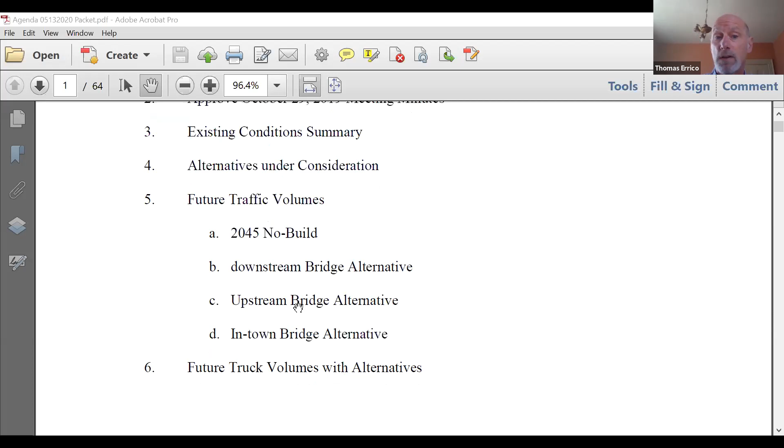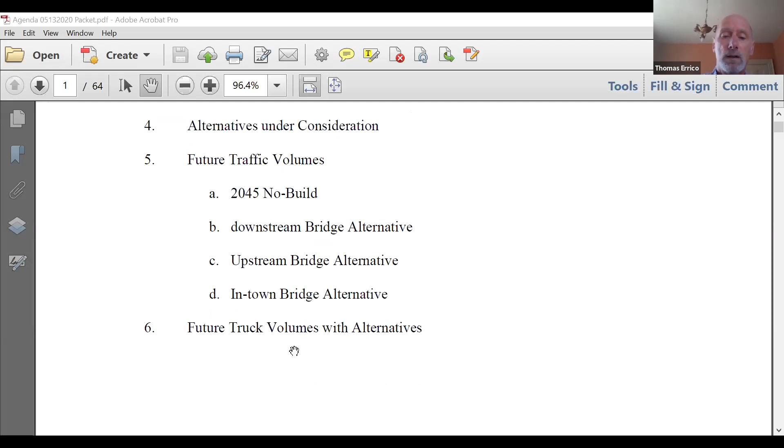It's really informative. We'll talk a little bit about truck volumes. We know truck traffic is important in understanding and assessing as part of our work. So we'll talk about that. We'll get into the highway bridge concept design, give you that 30,000 foot view of what we've been doing from that perspective. Talk a little bit about system management. Are there things you could do within the existing roadway infrastructure to make things work better?

Talk about the next public meeting. We had a public meeting last September. We're now ready for another one to start feeding some more information, like what we're going to show you today, to the public. Hit on schedule, and then anything else anybody wants to talk about. So that's the agenda. That's how we're going to walk through it.

I know I'm interrupting, Tom, but how long is our meeting gonna take? Can we come to a little shared agreement on that? What are you thinking, Tom? I'm thinking, certainly it's based upon input, feedback and discussion, but I would think we'd be running about an hour from this point forward. Does that sound okay to everybody before I let Tom go? If we plan to adjourn this meeting about 11:15? I don't see any objections. So that's what we'll plan on.

And Tom, would you like people to hold questions or interrupt, or whatever? I'm going to turn back to you, but whatever. Yeah, turning back to you, Tom. Yeah, thanks, Craig. I would just as soon have questions as I proceed along. That's traditionally how I like to do it if we were doing a face-to-face meeting. So if we're going through something, raise your hand and I'll do my best to respond. I'll say that if I can't respond to a question today, we'll provide some sort of written response. There may be questions I don't have an answer to, but we certainly will get you some response formally if I can't answer it today.

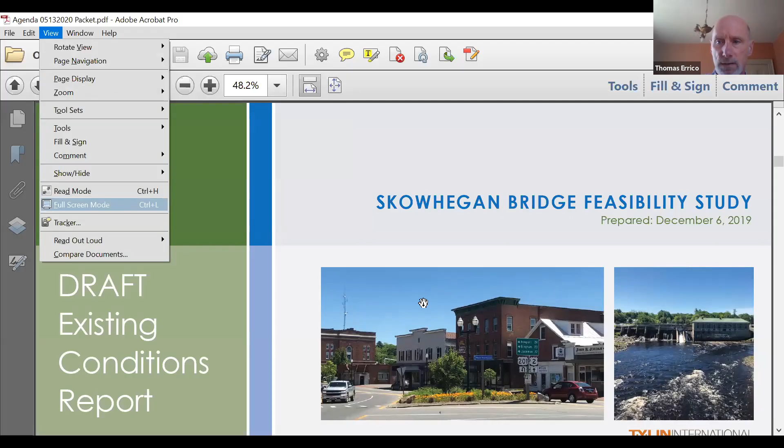There's a lot here. I just want to hit the high points and go through this. It's still considered draft, there's still some revisions we're doing, particularly as it relates to the environmental section. There are just some minor tweaks before it gets the final stamp put on it, but I'll give it a 98% complete rating on where we're at. It provides a lot of information.

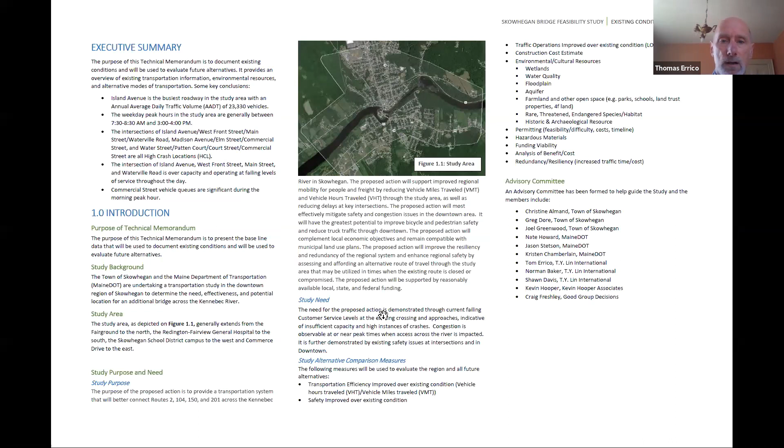Remember, we've talked about this, the study purpose. I'm not going to walk through it, but that study purpose and study need is our guiding principle about what we're going to refer to as we continue to move along and look at these alternatives in specific detail in terms of measuring feasibility. So just keep that in mind, it's in that document, something we're going to go back to quite a bit.

Back last June, the Department of Transportation collected a lot of traffic information. We have really good information. These bubble diagrams represent, I won't torture you by going through them, but basically how many vehicles are turning at certain intersections. This is really what we rely on in understanding the performance and how well intersections work or don't work from a congestion perspective. So these are important, really solid information.

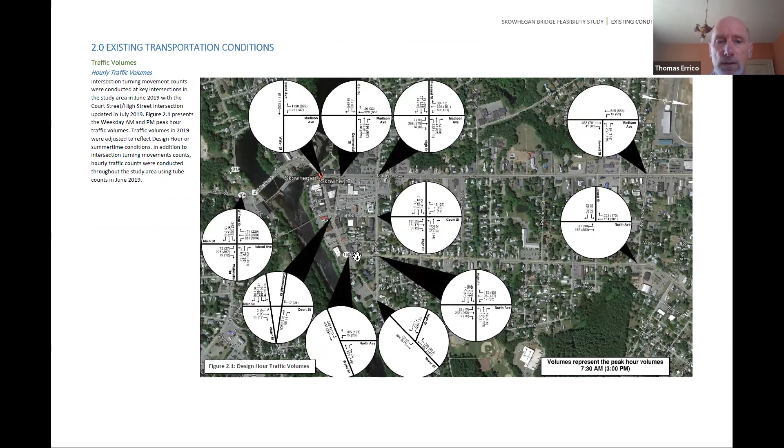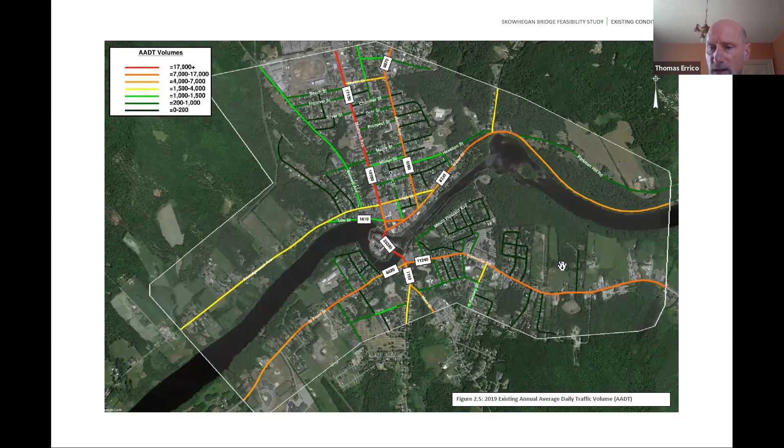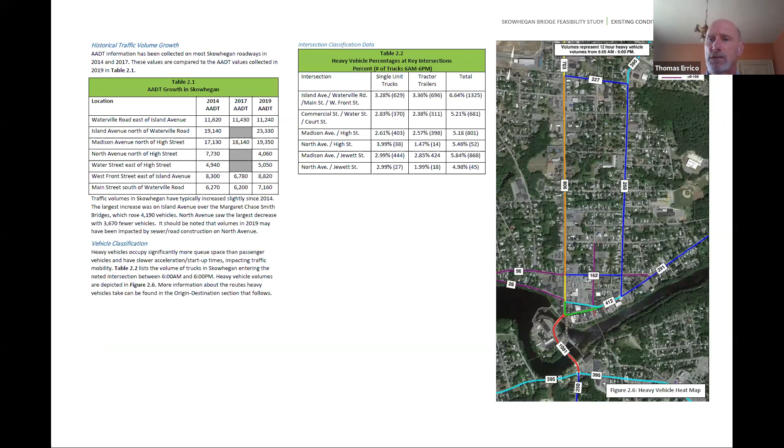One of the things we wanted to do as part of our baseline understanding of traffic conditions is really understand origin destination patterns, particularly related to trucks and other vehicles too. We collected and analyzed some data that helped us understand that, and this data represents basically patterns crossing the Smith bridges and sort of origin destination.

So from the standpoint of where are they going to the north and east - there's roughly 47% headed up towards 201 north, 35% heading up North Avenue, 18% heading east on Route 2. On the south side, 35% of these heavy vehicle trucks headed west on Route 2, 50% headed east-southeast on 201, and 15% headed on Main Street. So that's generally the pattern of trucks.

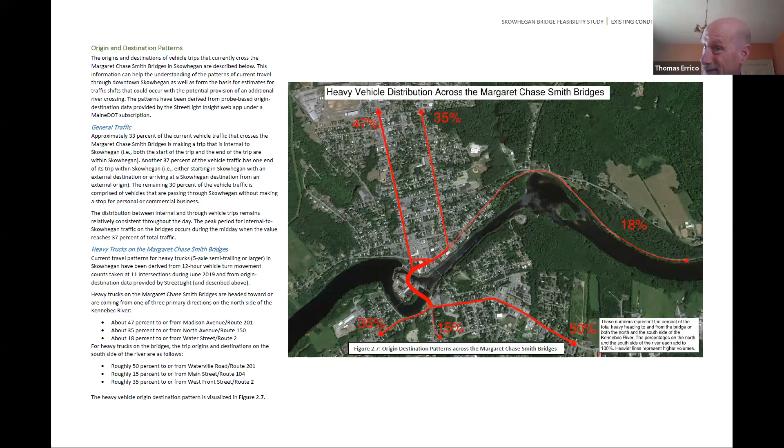We also drilled down to understand specifically - and this is really informative to understanding, like if you built a bridge, where would the trucks go. We found that if you're arriving from the east on Route 2, about half would cross the bridge and half would go up 201 north. In terms of vehicles exiting on Route 2 going east, about 71% had origins on the bridge to the east, and 25% was coming down 201 and going east.

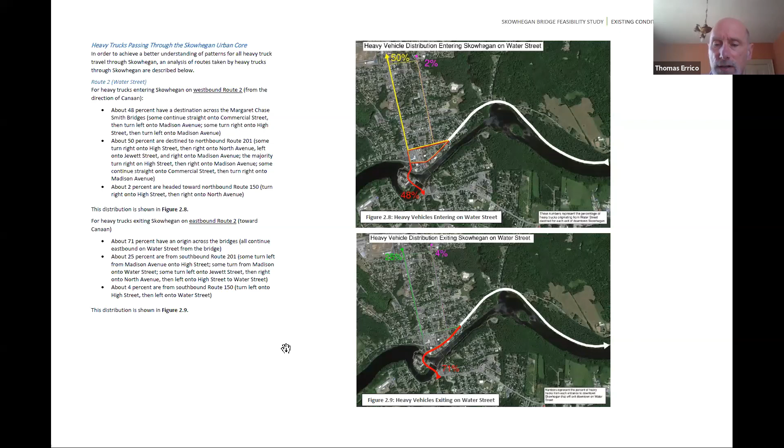So we had various origin, destination, entry, and exit points, and these graphics present what's happening from a truck distribution perspective. I'm not going to go through these, but I think they're relatively straightforward.

I'm not going to talk about that.

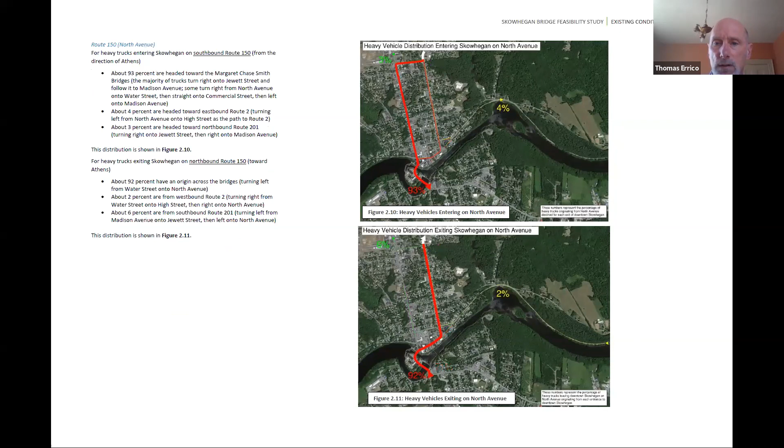There were a couple others that had some crashes that weren't technically high crash locations, but had a certain number we thought were appropriate to add.

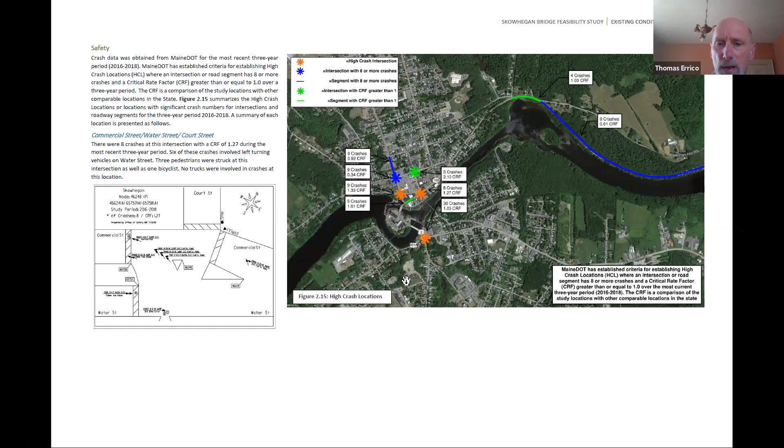We have collision diagrams that tell us what's happening at those high crash locations. This is the Commercial, Court, Water Street intersection - vehicles going around the corner, the triangle, getting hit by vehicles going west. You can see how things shake out at the various locations in terms of pattern, which helps us understand what's going on and maybe how to mitigate some of those safety problems.

The next thing is related to traffic mobility and intersection capacity. We have a model where we plug in information - traffic controls, signal timing, the number and type of vehicles, and other things - and come up with something called level of service. Qualitatively, it's rated like a school grade card from A to F, A being a good intersection, F being poor, and it's delay driven - how long you wait at an intersection in seconds per vehicle.

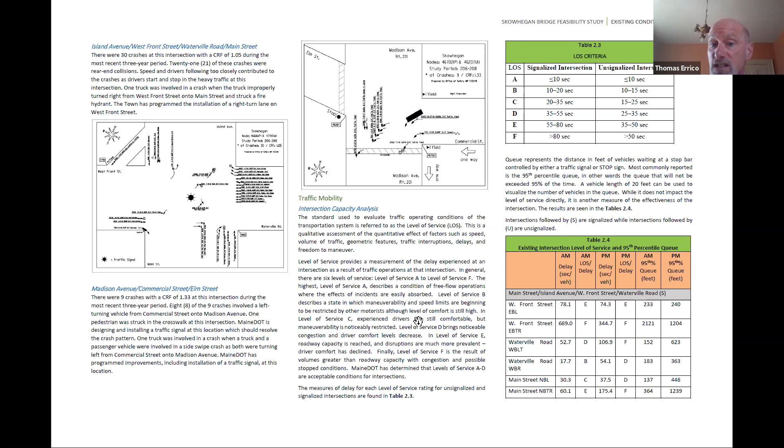The first intersection in this table really doesn't work well - everybody knows about it, Main Street and Island Ave. The model confirms what we see in the field: long queues, long delays. Many of the other intersections, quite frankly, work reasonably well. Some of these conclusions assume optimization of the traffic signal timing, if it is signal controlled.

The one other intersection with issues from a delay level of service perspective is Madison, Elm, and Commercial Street. This is setting the baseline, and we'll use this model to estimate level of service and delay in the future with various alternatives.

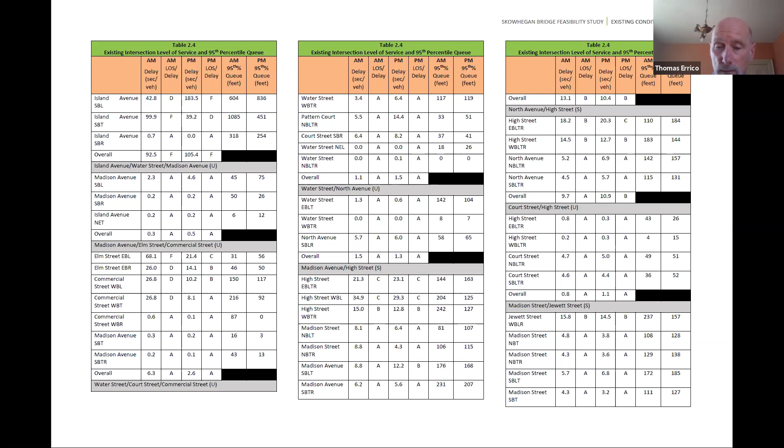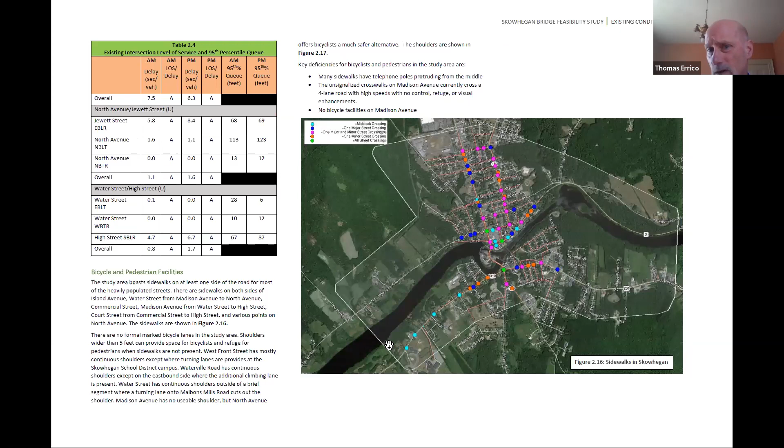We looked at bicycle and pedestrian facilities to gain an understanding of those modes and infrastructure, and what's accommodated in terms of sidewalks and crosswalks. We provided general qualitative documentation of that, talked about shoulders related to bicycle accommodations - are there shoulders so a bicyclist has appropriate space - and documented that. We also talked about bus transportation and what's available in terms of alternative modes. That covers most of the transportation part.

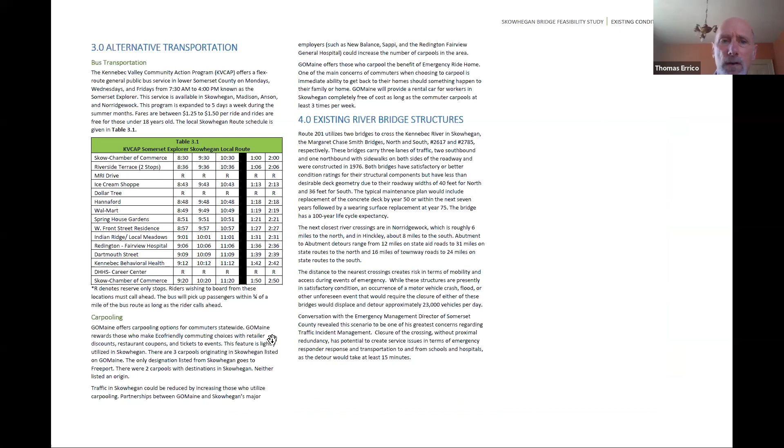The second part of the document relates to environmental resources - that's our subconsultant, TRC, an environmental consulting firm based in Maine. They looked at historic, archaeological, and natural resources in the study area, that yellow area, covering a host of things.

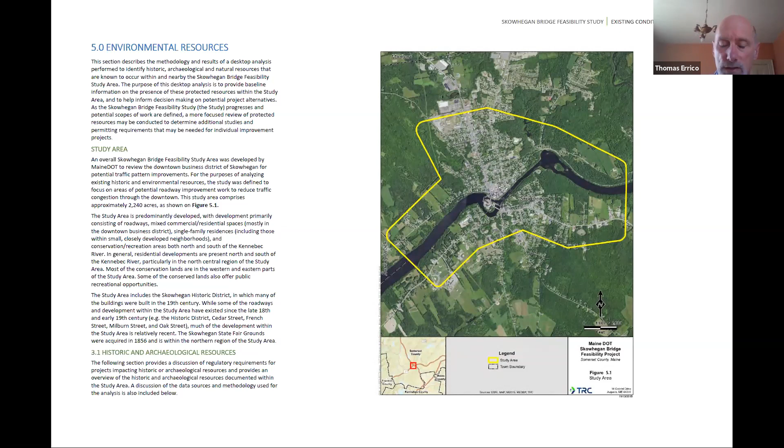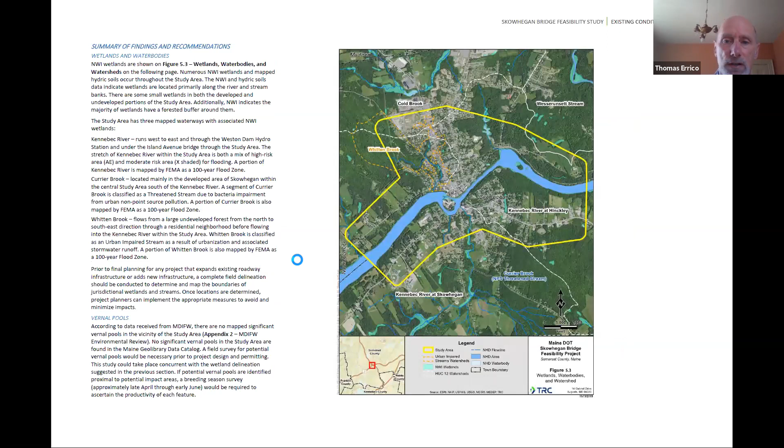I'm not going to go through this, there's a lot of detail here. They've done great work establishing what resources are there and how different alternatives could potentially impact various locations. They've got a lot of good information. I'm a traffic guy, so I don't have a lot of expertise in the details of this stuff, but they've performed a baseline analysis of what's going on from a resource perspective on the project.

So any questions related to the existing condition report that anybody has? Okay, hearing none, I'm going to keep on trucking.

The next part of the agenda was to summarize the alternatives that, quite frankly, we've been working on. This has been going on for a while now.

So this memo was a brief memo that was circulated to both the town and DOT to generally, broadly talk about the alternatives that we're going to evaluate as part of this study. I'm going to walk through these, and I've got a graphic that's attached.

We're going to do something called a no build, which is basically evaluating conditions in the year 2045 - what's it going to be like out in Skowhegan, assuming no infrastructure changes other than improvements already programmed. The one we list here is that currently the Department of Transportation has a programmed improvement to install a traffic signal with some geometric improvements at Madison and Elm and Commercial. So that one's going to be assumed, and we're going to look at what it's like in 2045.

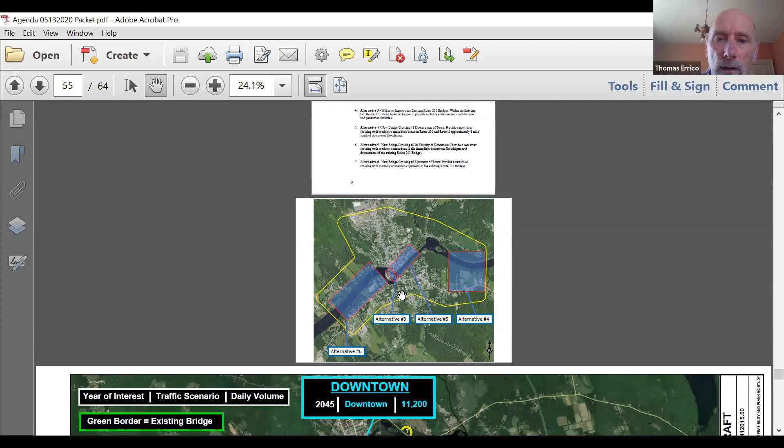And the reason I'm asking - I know looking into the future, and I also realize this is a second bridge project and not a connector project, but there are some concerns I recall from the last public meeting that we had, looking into whether a connector/bypass should be considered, and which would be the location to accommodate that alignment, I guess is what I'm asking.

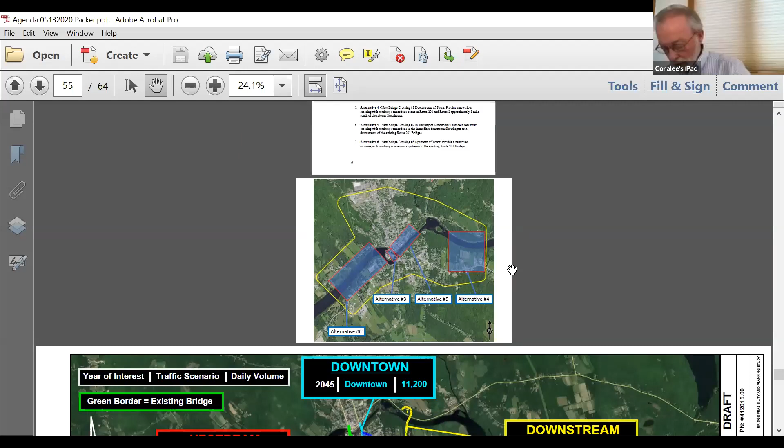Correct, that's exactly what that is. That's the Eagle's Nest location. We feel that we can locate that downstream bridge location to be compatible with the Eagle's Nest area, to avoid the area of impact. So we've created an alignment to do so. We show it in this next graphic. We've located it to avoid that Eagle's Nest area.

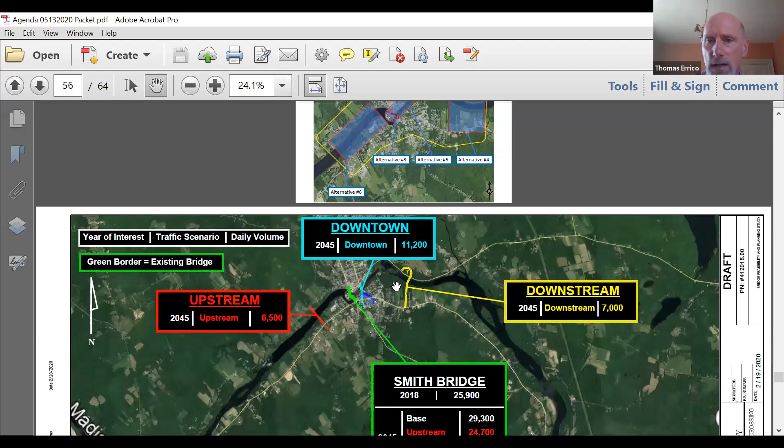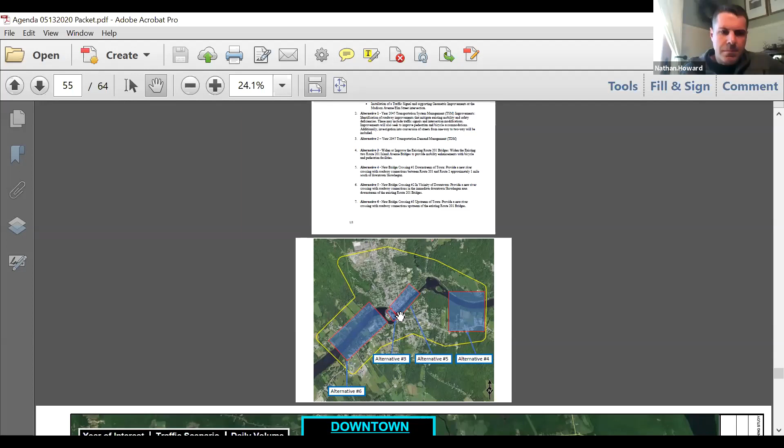Yes, I do see that. And the second part of my question was, in regards to the future, should it be necessary to do a bypass connector with the second bridge, were those considerations made as well? I only bring it up because it would be a shame to do something and then 20 years down the road realize we should have put this bridge elsewhere to get the alignment we need for such a project.

Tom, this is Nate Howard, I can chime in on that. I'd say that ship has sailed. That study was canceled years ago. There's no real consideration of the bypass, which is specifically outlined in this. So I understand where you're coming from, but that is not really a factor in the study. It's purely looking at second bridge alternatives.

Thank you. All right, any other questions before I move on to some traffic data?

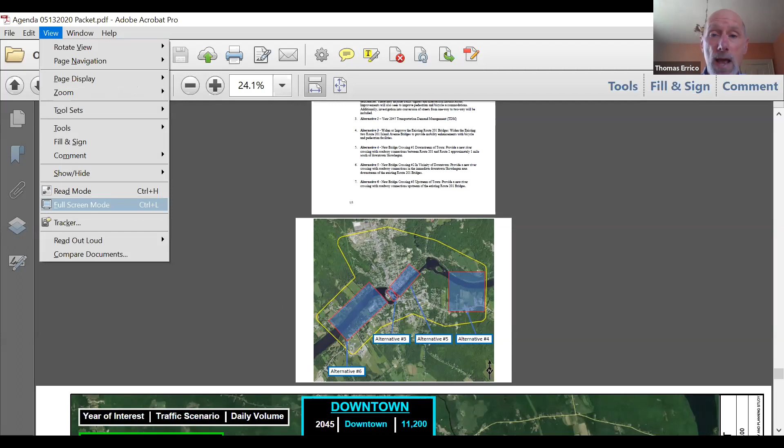All right, let me go to full screen mode. So again, we have a consultant on our team, Kevin Hooper Associates, whose purpose is only to do this kind of work, basically project traffic—that's all he does—based upon existing information, socioeconomic population forecasts, and then what happens when you build these potential improvement alternatives. So we've been working closely with Kevin to look at what happens if you do this or that, what it means from a traffic perspective.

So this graphic basically summarizes daily volume—how many vehicles are crossing over an entire day—and what the change would be with some of the bridge alternatives. I'm going to walk through this a little bit to give you an explanation.

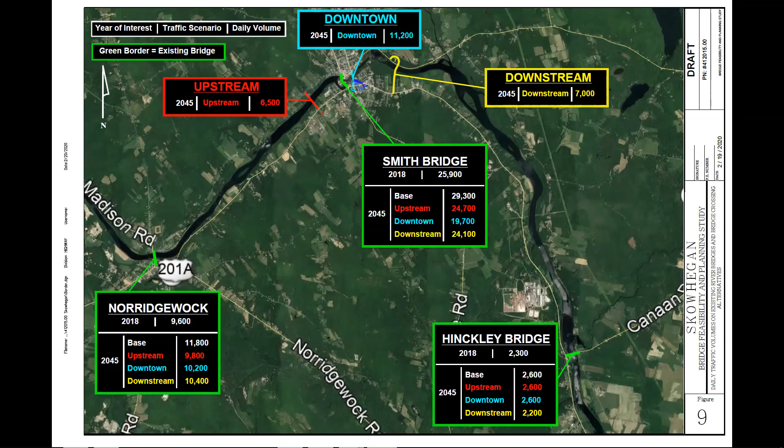I'll just add one more thing, going back to Tom and Nate. From my perspective as a taxpayer, I want to make sure that whatever this committee, and ultimately the design committee with Greg and Christine, comes up with, the funding for the solution includes the intersections. If the solution ends up being a new bridge, that's fine. But if we haven't fixed all the problems, even if that problem is 2 miles up Madison Avenue and an intersection needs to be timed differently to make everything else work, I want to make sure we're providing the taxpayers a solution as a whole, all part of that funding.

We don't want to get to a point where 10 years from one solution we have to come up with another solution to fix this. I watched this happen — I'm a Boston boy, I watched it through the Big Dig. We solved 10 problems to create 20 more. Yeah, you drive through Boston really fast now, but you sit on the south side of the artery for two hours to get into Boston. So what's the difference? The solution didn't solve the problem.

I'm coming from that perspective, so our solution as a team needs to take all of that into consideration — the traffic flow all the way from the Madison line to just outside the urban limits for 201 and Route 2, in both directions. As long as we've got the whole solution, that's ultimately what I want to see come out of this — the whole solution and the whole solution funding source. There you go. Thank you.

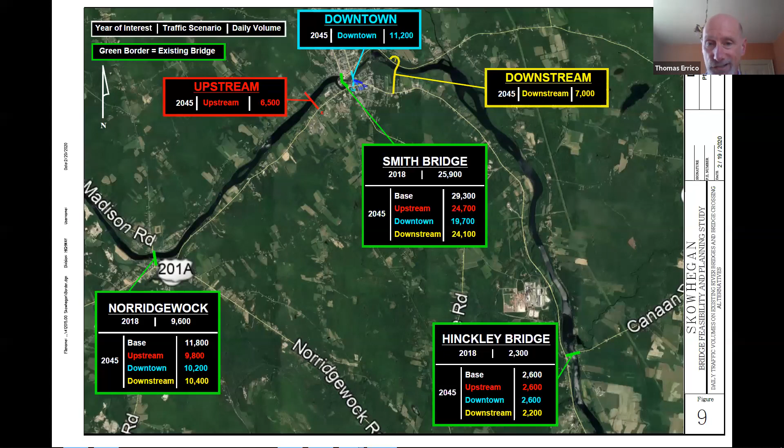The next graphic is just to let you know that we're also looking at what happens from a truck perspective. Because it's one of those purpose and need metrics, as we move forward in our documentation you'll see that we've got to understand what it means from a truck perspective - are these alternatives pulling trucks out of downtown, out of the triangle, as Nate said?

So we're doing future growth forecasts of trucks in the area. Through that same statewide model, we've been able to make projections about how truck traffic is going to change. It's a similar sort of growth projection as passenger cars - we're estimating about a 15% growth in truck traffic over the next 20 to 30 years.

Like a previous comment - we're going to intercept some trucks on Route 2 that would go across this downstream option. But what does it mean in terms of downstream, in terms of how those trucks are going to circulate on 201 through some of those intersections? So we've got to look at the implications, which is why we'll go back to the turning movements and understand how trucks are going to maneuver to different locations. What does it mean geometrically that a truck now may be a through movement, and in the future it's a turn movement? That means a lot to us in terms of providing appropriate roadway infrastructure to make sure they can make those maneuvers. We're going to be looking at those kinds of things.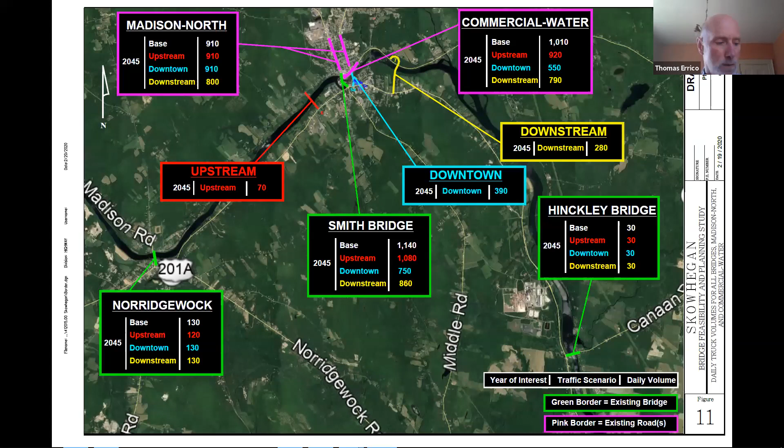Okay, so let's go through that now. Just so you know, some of this work was done back in February - we've already been doing more analysis and concepts. We're laying out concepts because to get a reasonable cost estimate, we've got to do a concept design of the roadway and the bridge structure. So that's ongoing now, we've got more detail. I don't have it for presenting now, but I can tell you since February we've developed some concept alignment in greater detail. But this is the downstream option.

We've got a pro-con table down below. No relocations required—relocations would be like a building or a home. Not significant impact to abutters. It's relatively shallow, so it makes pier construction somewhat easier.

Some of the elevation challenges, particularly on the Route 2 side, will require an overpass. So you create a slightly longer structure that goes over Route 2, and then it loops down to create the intersection. You may wonder why it's doing that—we cannot get down to grade to create what you'd normally see as a T intersection, like you do in 201 here.

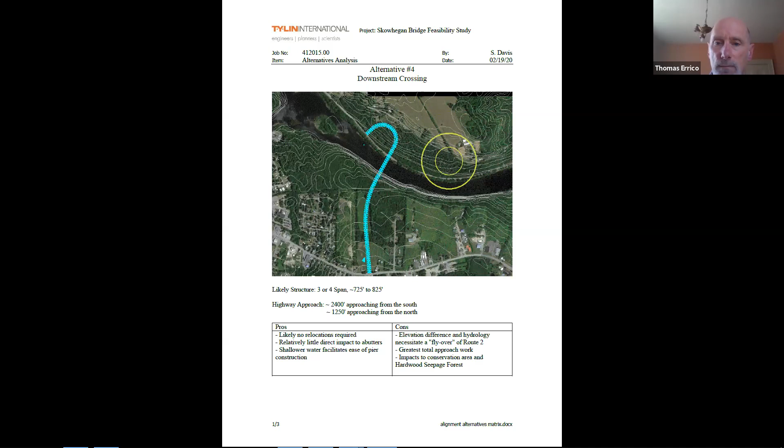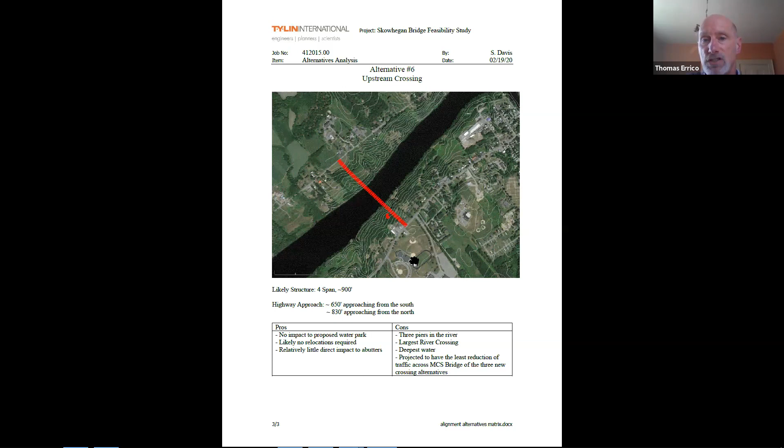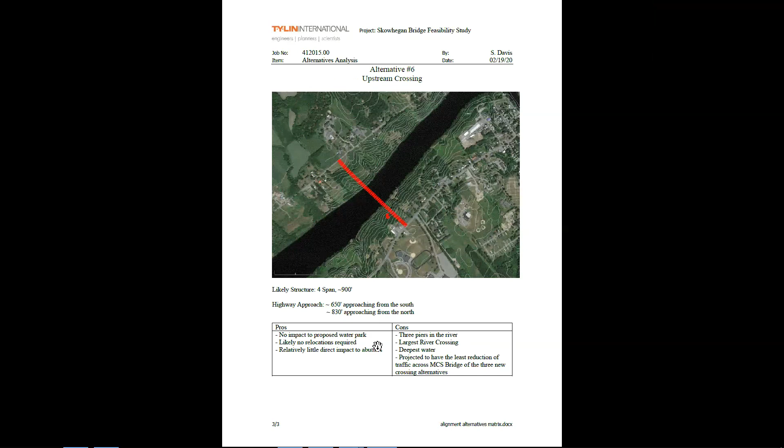Should we gauge whether to extend this meeting or hold another one? If I can chime in, I'm almost through the agenda—after this table we get into some discussion on TSM, which should be quick, and then we go to schedule. So maybe 10 minutes. How much time do you think it'll take? I'm thinking 10 minutes. Okay, I'd probably double that if we're going to talk about the next public meeting. So is it okay to go 20 minutes? Anybody opposed to that?

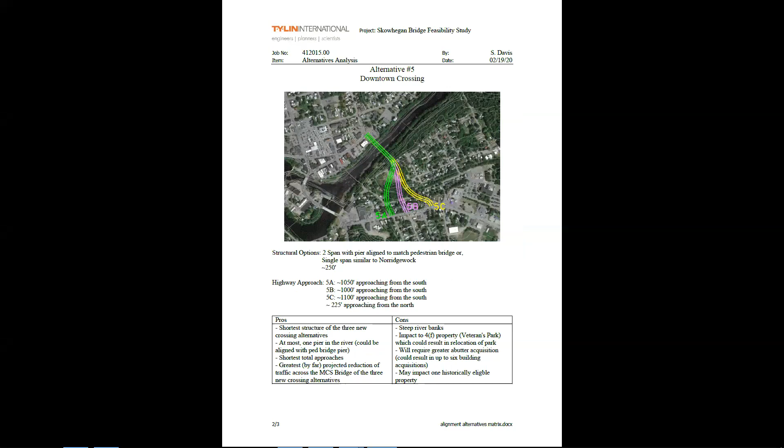No. All right, I would prefer to press on than to have another meeting. Agreed. Okay.

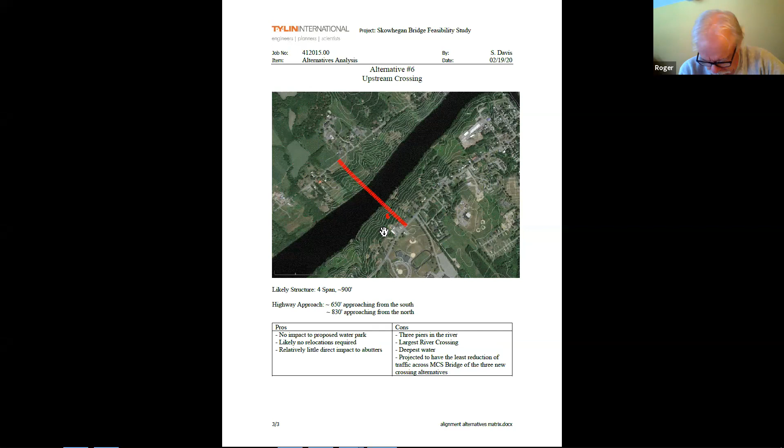So this table, I'm not going to go through it in detail. It's basically a quick summary from our bridge engineer, getting into slightly more detail than the prior summary for each one. It talks about similar things: the number of spans the structure would have, is it easy to build, and some of the complications. I think that's almost repetitive, so you can go through it yourselves.

The other thing I wanted to talk about is TSM, the alternative transportation system management. These are the locations we need to focus on as it relates to either safety or mobility and congestion. At Commercial Water Court, remember there are safety problems there. We're going to have to look at and identify potential ways to mitigate those safety problems. We haven't figured that out yet, but I wanted to lay the groundwork for the locations we'll be looking at as part of trying to make recommendations.

I'd say probably one of the greatest congestion bottleneck locations is the South Side intersection. It also has safety problems, and that's not unusual, to have both safety and congestion problems at the same location.

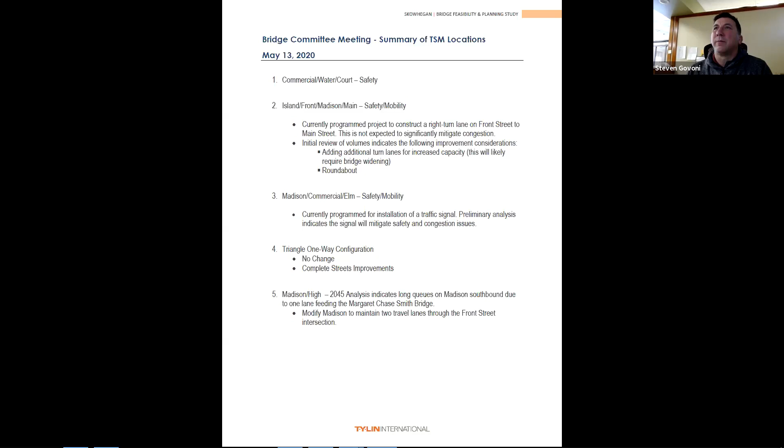I think the intersection needs to get bigger. I agree, I just don't see how that roundabout will work, though. I mean, that's not just bigger, that's 4 times bigger.

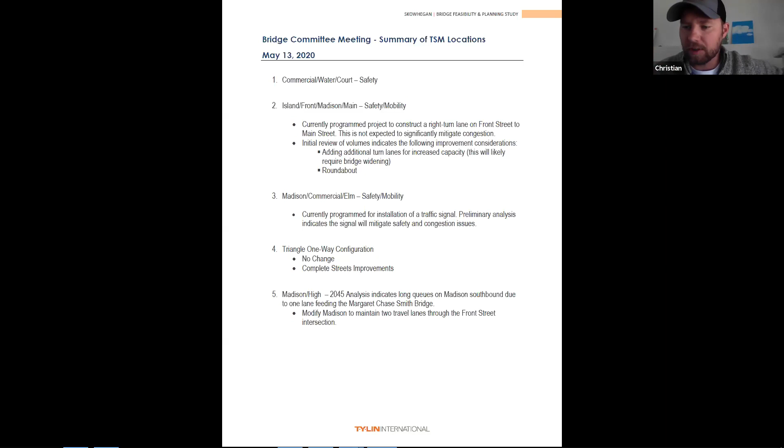Well, and that would entail securing an additional lane along the bridges, in between the bridges, right? So that would run into the fire department and abutting property owners. Sorry, my son's yelling at me. That's okay, that's okay. No, again, my sense is yes.

And just understanding, if you want to get efficiency and performance of 2 lanes, you need to carry it, like the merge issue, right? You get 2 lanes that drop right after the intersection. To get really good performance, you've got to carry it a long distance. It's likely you'll be widening both bridges, that's probably what would happen in those scenarios.

So doesn't that still dump everything back into town, which, you know, even if you have 2 lanes going across the bridge into town, what do you do with them once you get into town?

It's a great question, yeah, it's a great question. And the roundabout, I kind of go on with the others logistically and geographically. That looks like it would really be a nightmare to achieve. And again, we're not getting the traffic out of town, which the two south bridges, I think, as the study shows, is more efficient than any of the others.

Yeah, I'm not disagreeing with any comment regarding the roundabout. We thought it was important to put it there for discussion purposes. What I didn't want to have happen is we work through these options and then get the comment, why didn't you look at a roundabout? So I think we still need to speak to it as part of this alternative, and why, maybe more from a qualitative perspective, we think it's not an appropriate type of improvement at this location.

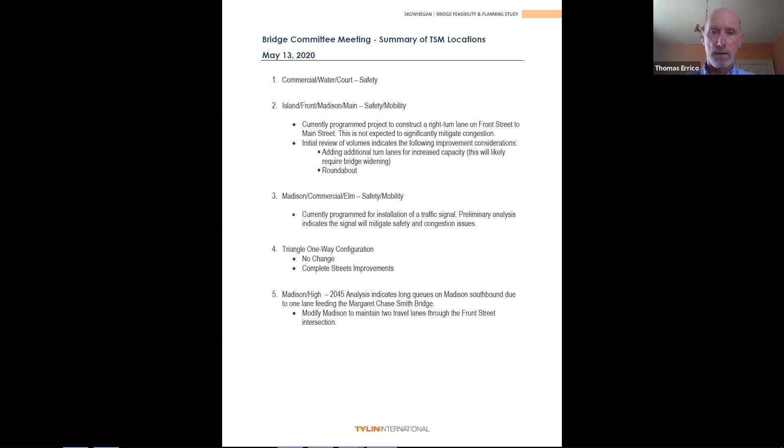All right, so that's that. And now, before the schedule, we were going to talk a little bit about the next step. So I'm going to, it's related to schedule. So we're here, May 13th, and really the next step in the process was to consider the next public meeting. And so I don't know whether, Craig, you want to lead the discussion on that, or not?

Well, first of all, let's remember that the purpose of the next public meeting will be to provide a little review of your existing conditions and needs, like you did for us just now. But that's just setting the stage for the real presentation, which is the different alternatives, the evaluation of alternatives, your analysis, and getting public feedback on those alternatives, right? Is that the way you see the purpose of the next public meeting, Tom?

I do. I don't know that we'll get into substantial detail, but we need to share with the public enough so they can have informed discussion, ask informed questions, and give informed opinions about these different alternatives. Let me check with the committee, is that what you see as the purpose of the next public meeting? Any hands? I'd agree with that. Yeah, that's helpful to hear.